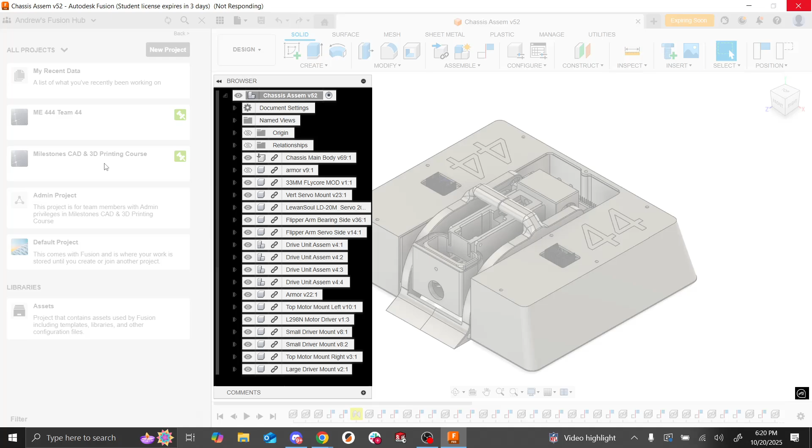In your hub, wow, this is super laggy. Open, please. Oh, nice. Okay, in your hub, awesome, Fusion crashed. Okay, so in your hub, I encourage you to create a folder, or I think it's a project. Some people put their files in default project and then they start losing their pieces. So I encourage you to create your own project. I normally name it like milestones class or something. There we go.

Yeah, so there's a new project button up here. I've already created a project, and then in there you can add folders and stuff like that. Obviously, I have several folders because I've taught this class a couple times. But yeah.

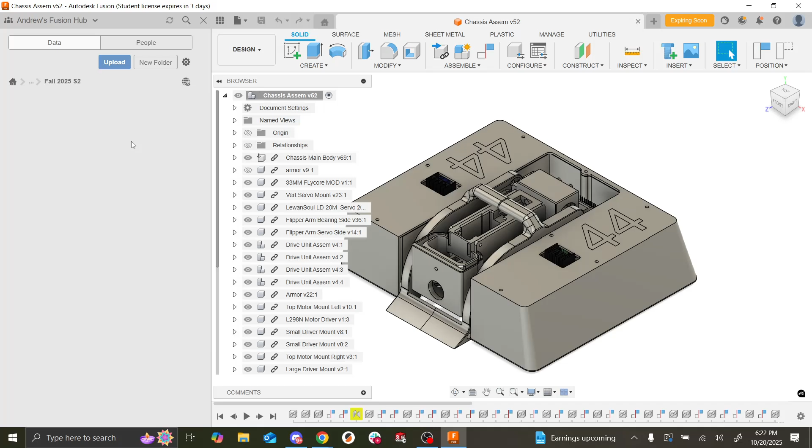Okay, cool. Also, who doesn't have a mouse today? Oh boy. Okay, I have one mouse. I will give up my mouse, but I encourage you all to bring mice to class. Just because... okay, sorry, we're unlucky today. If you bring a mouse, it typically makes CAD easier. So yes. Okay. So much fun. I wish I had more mice. Maybe I should bring more.

Okay. So raise your hand if you're not at this point in Fusion where you just kind of have a blank document. Okay, it's because you have a Mac, right? Is it because you have a Mac?

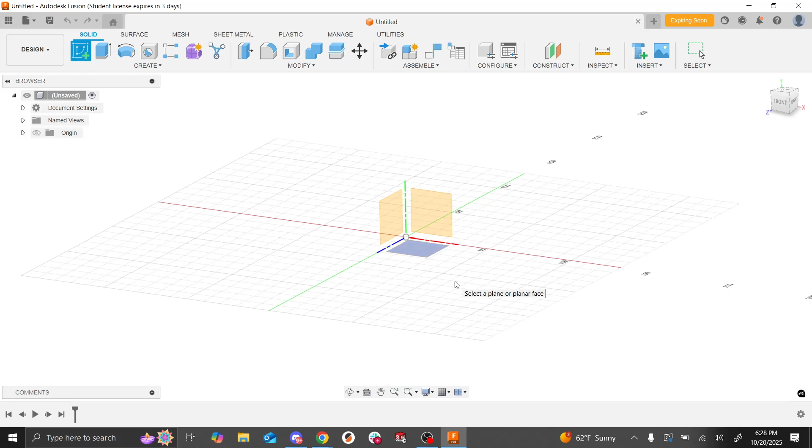So at the beginning, it gives you 3 different planes that you can work from, but then when you create more stuff, like once we create our cube, you can also reference those spaces that you've created. So right now there's just 3 because it just gives you an origin and XYZ, but I'll show you in a little bit that you can reference other stuff because it can be useful. So I'm just going to click this, and then you see the toolbar changes to the sketch toolbar.

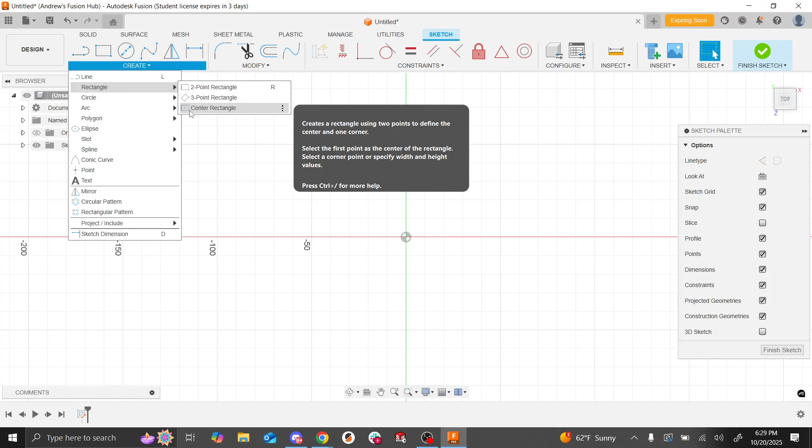I want to create a cube, so I'm going to create a rectangle. I typically like making a center rectangle because that just means it's centered from wherever I want to create it. Best practice or good practice in CAD is usually basing all your dimensions and stuff off the origin. So you can see there's this dot in the middle of the screen. That's the origin. Obviously, I'm going to deviate a little bit from that today because we're making 3 models in one part. But for the first one, I'm going to do it, in my opinion, the correct way. Obviously, you can not do that if you really want to, but it's typically easier for constraining.

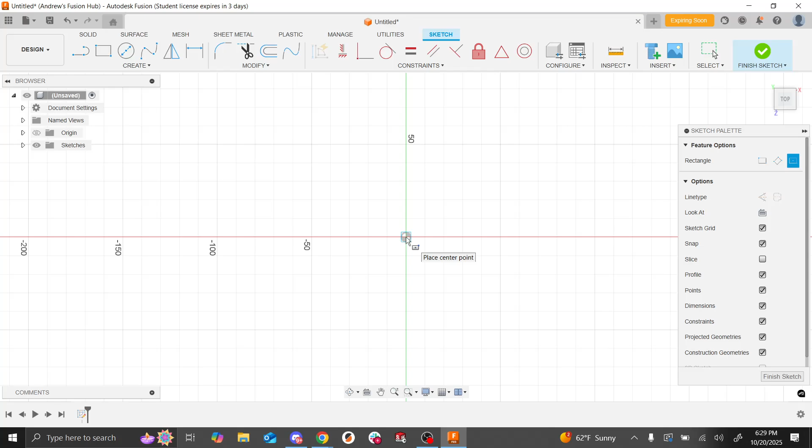So just make your rectangle. You can see the outer edges on the rectangle are blue. So blue on lines and curves means it's undefined, right? And when it's undefined, you can kind of stretch it in space. Oh wow, I accidentally just made a square perfectly. Okay, let's fix that.

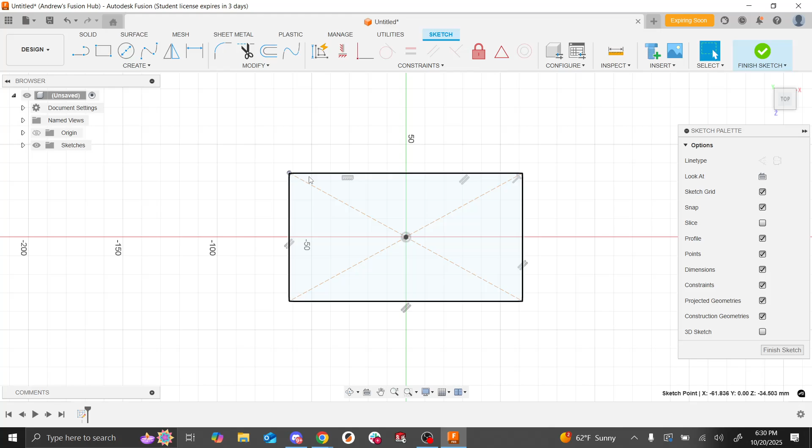So yeah, you should be able to move all around because it's not constrained. We haven't told it to do anything. But it's referencing to the origin, right? So you can see I can't move this rectangle side to side, which is a good thing. That means we only need to apply 2 constraints to make it fully defined, right?

So to add a constraint, today we're just mainly doing dimensional constraints. So there's the sketch dimension tool. You can click on a line or a curve or 2 lines. Click on 2 lines, you can get an angle, but we're not really doing that right now. And then you can set some dimension.

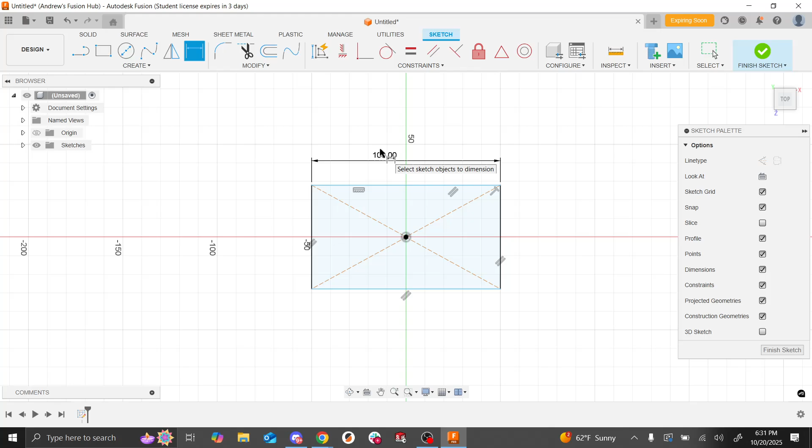In terms of units for this class, I don't really care what units you CAD in. I think there's only one assignment where the numbers on what I do matter. So if you're trying to copy me, but instead of 100, you do 120, that's totally chill. I will make sure to specify when you should be copying my dimensions. But for the most part, I'm not going to because you can do whatever you want.

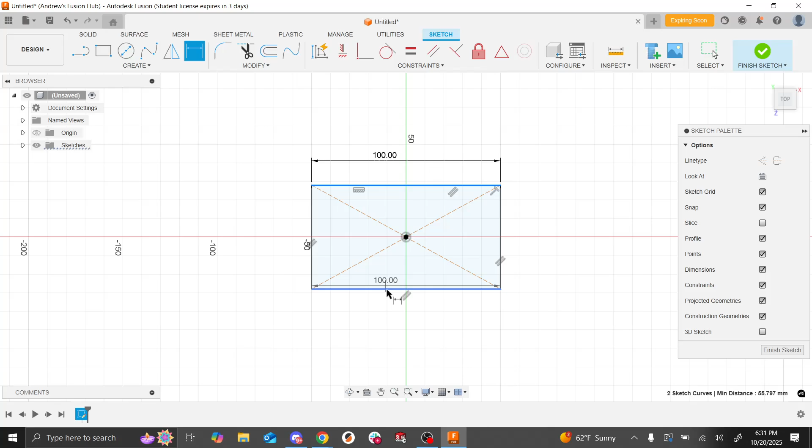So now that I have this 100, because it's a square, I'm going to make this 100 as well. We're going to be talking about geometric constraints next week. So normally I would make these 2 lines reference each other and I'd say they're equal to each other if I want a square, but I'm just doing 2 100s today, if that makes sense.

Yeah. Who's not here yet?

I know I'm going slow, but this is very fundamental, so I want to make sure you all know this very well because this is what you're going to be doing most of the time. Cool. All right. So, wow, we have a square. This is crazy. I'm going to press finish sketch because it looks very square-like and done to me. You can see here if I spin around, it's just flat, right?

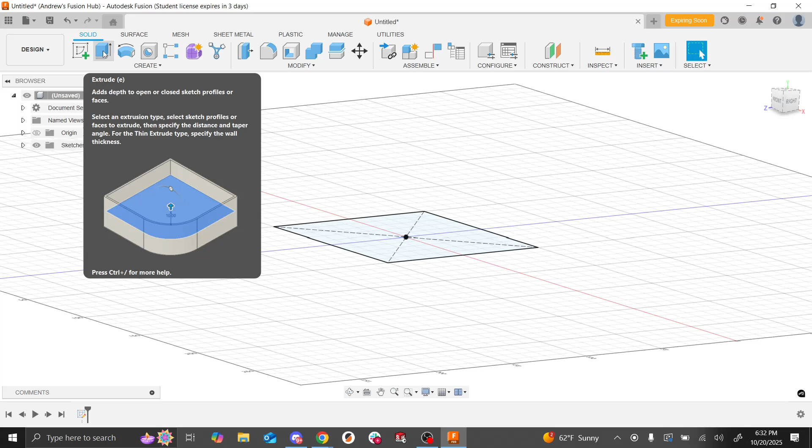To make it 3D, we're going to use the extrude function. One nice thing about Fusion, another reason why we like teaching it, is that a lot of the buttons are very big and colorful, and if you hover over them, it gives you a visual example of what it does. So you can see here, this blue section is the plane, and then you can see they're extruding apart, right? So we're going to do that as well. Fusion auto selects a plane in this case, but if it doesn't, you just click on the areas where you want it to be extruded.

The start is basically where you want the extrusion to start. Typically, if you placed your plane in the correct area, it's just going to be profile plane, but sometimes you want it to extrude offset from it, or extrude from another face that you're referencing. So those are two good options. I use that a lot, but today we're just doing profile plane.

For the direction, sometimes I like to do symmetric or two sides, depending if you want it to be asymmetric. But today I'm just doing one side. Basically, it'll just go from this face in one direction. A lot of these terms are pretty self-explanatory, so yeah.

For the extent type, we're doing distance because it's a manual number, but you can also have it extrude to other objects. So if it's a curved surface, you can select an object and then it'll extrude up to that curve. So it's usually pretty nice. And then through all is just to the farthest thing in your model from wherever the plane is. Sometimes it's good if you want to cut holes.

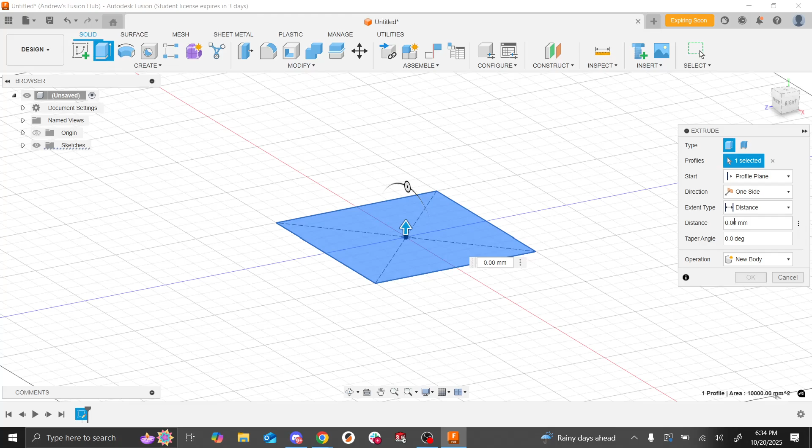So I'm going to do distance because all the other edges are 100. I'm going to do this as 100 as well. And then wow, we have a cube.

It's pretty crazy. I'm assuming everyone's following because I'm going, yeah. Okay, sweet. We good? Okay, so I'll do the next one a little bit faster now. Hopefully you guys don't fall asleep.

But we're going to do the cylinder next. Again, that's just a circle and then an extrusion. You can see when I press sketch, it'll give the three planes from the origin as an option, but you can also select this face or that one, right? All these faces from the cube. So I'm just going to select one of these cube faces, and then I'm going to draw a cylinder.

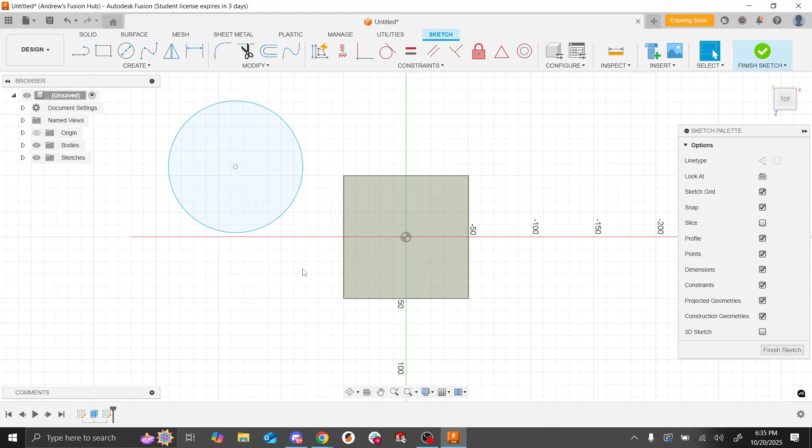Again, I'm deviating away from best practices now just because we typically don't model more than one part in the same document, but this is for demonstration purposes. And then I'll explain why, right? So before we had the center circle or center rectangle on the origin. If we do a circle out here in some arbitrary space, and then I dimension it, so 100.

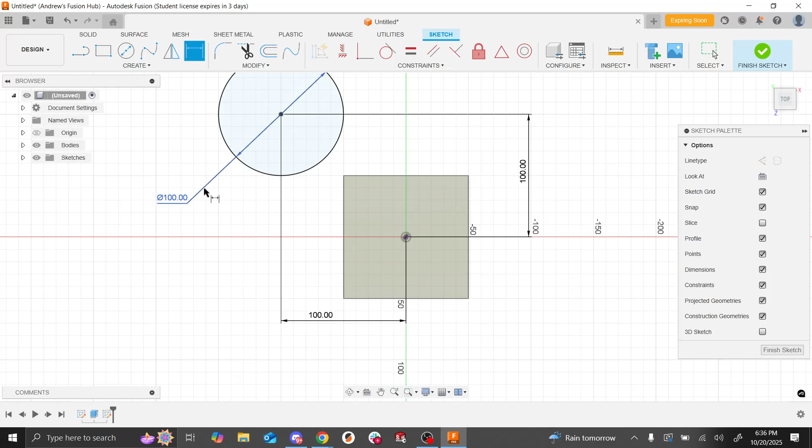The size of this circle is obviously not ever going to change now, similar to that rectangle, but it's still blue. And the reason is because you can drag it in free space because it's not constrained from the origin. And when you do that, you have to add more constraints. So you have to say the center of the circle is this far from the origin in the X direction, and it's also this far in the Y direction, right? So now that I've specified these two extra dimensions, this is fully defined.

Again, you can do this if you really want to, but it's usually easier and best practice to just put your stuff on the origin. It usually centers all your parts when you make an assembly, makes it a little bit nicer, and it just avoids these random arbitrary numbers. So yeah, I hope that makes sense.

The other thing I didn't really note is that closed bodies are highlighted in blue. It might be hard to see on the projector, but if you look at your screen, inside the circle, it's highlighted blue. That means it's closed, right?

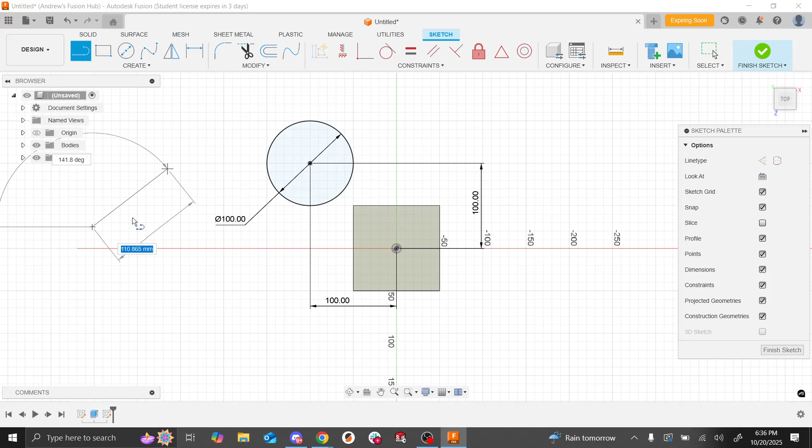So for example, let's say I have this arbitrary triangle out here, but I may have misclicked and these two lines are close to each other, but they're not quite touching, right? It's basically a triangle, but you can see it's not highlighted blue, and it's because it's not closed. The only way to fix that is by making sure it's closed. And you see when I joined those two points, it became highlighted blue.

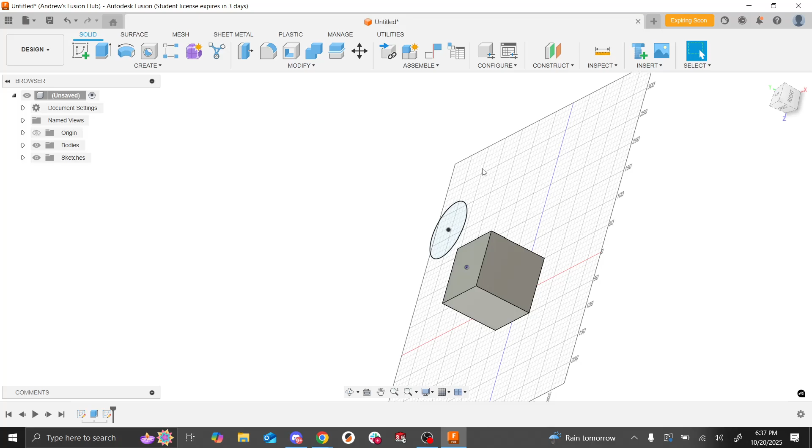So if you're ever wondering why your thing isn't allowing you to select it for an extrusion, it's usually because your body or sketch isn't closed. So keep that in mind. Anyways, I'm going to finish this sketch, and then I'm going to extrude this just like before. I'm just going to use some different tools so you can see how it works.

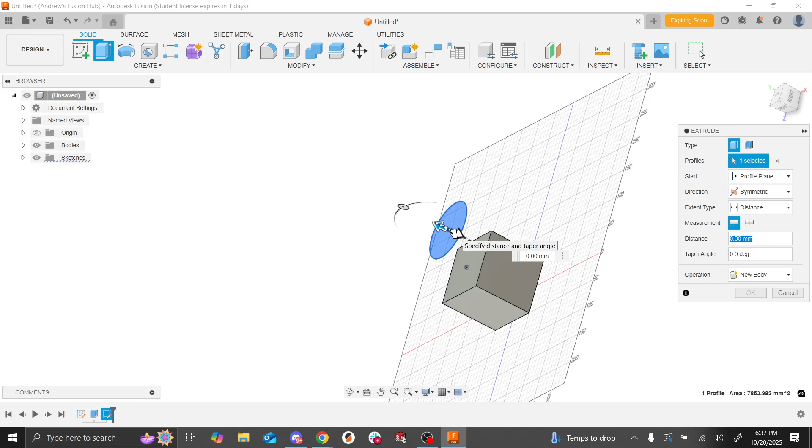So for the direction, I'm going to do it as symmetric. The distance, I believe, is the distance from one side. So let's say you want this to be 200, but you're doing a symmetric extrusion, you have to do 200 divided by 2. In this case, it's just 100. So 200 divided by 2.

Each side is extruded 100 millimeters. If you look at the sketch in the timeline, you can see it's referencing this plane. So when I extrude 100 in both directions, it made it flat on the same height as this. If you did the exact same thing as me, it should look like this. But if your numbers are different, that's fine.

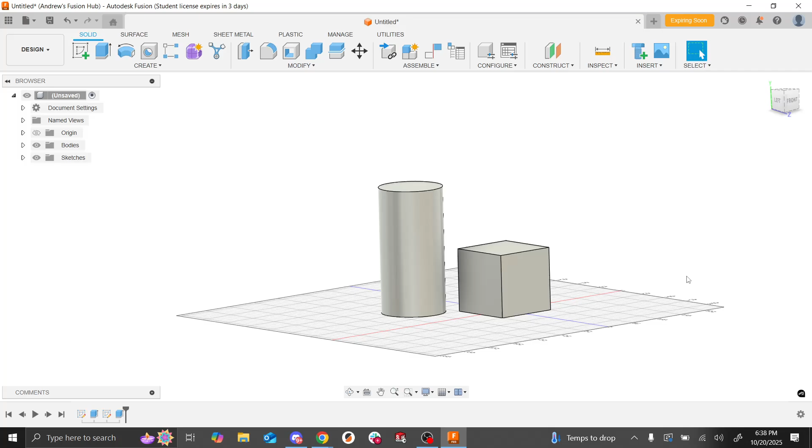Awesome. Okay, so for the last one, there's a couple different options on how you can do this. CAD is kind of like writing, everyone has their own style, some people have preferences for certain tools. So there are a couple ways you can do this: you can make a rectangular prism similar to this cube and then cut out a semicircle, or you can make it all at the same time. Depending on what you're designing, one way might be better than the other—like if that arch changes a lot, maybe it's better to do it differently. Considering it's just a simple block, I'm going to do it all at the same time, but there are different ways of doing this.

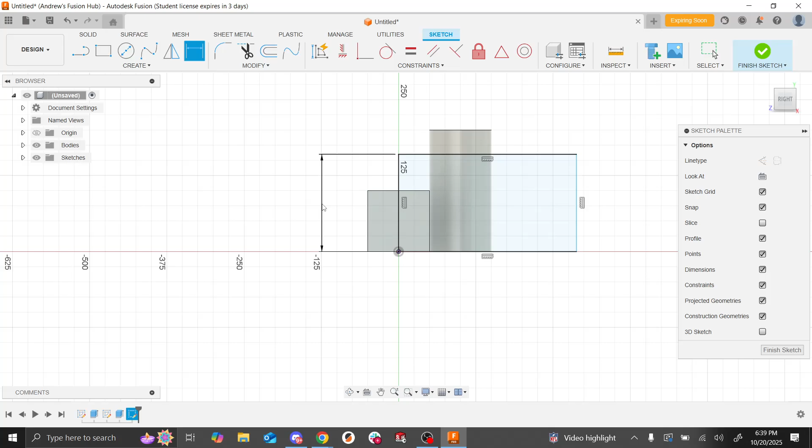For this, I'm just going to create another sketch. I'm going to reference this plane, and this time reference the origin and create this rectangle here. You can see these two lines are defined because they're already connected to the origin. Going to specify some heights and lengths, and then boom, that looks good. So we have our rectangle.

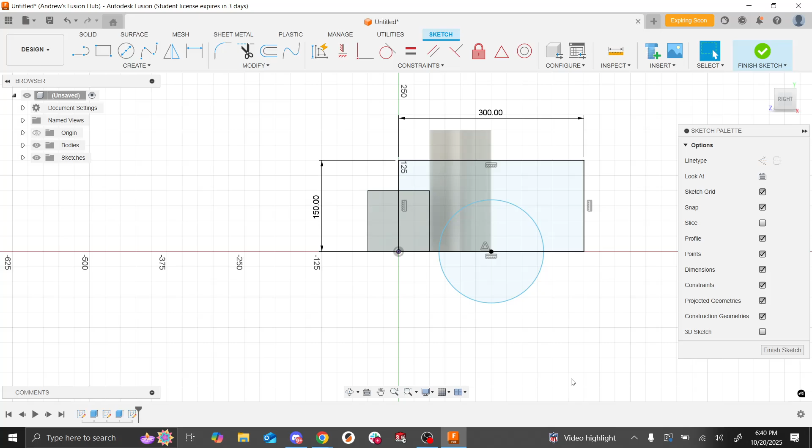Now we want that circle. We're going to add a circle onto this rectangle. You can see if I run along this line, it'll snap at certain places—sometimes to the grid, but there's this point here where it snaps with a triangle above it, which is the symbol for the midpoint. That means my mouse is currently in the middle of that line. So I want this centered, I'm going to do that and add some dimension.

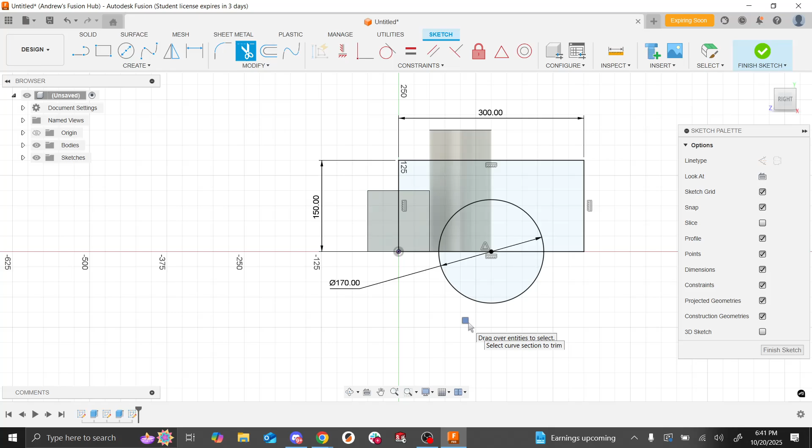And then boom, you see here we have a couple of different closed loops. I just want to trim it away so it's nice and clean. So I'm going to cut this side of the circle away and also this center line, and you'll see some stuff change. To do that, there's this scissor tool or trim tool—the hotkey is T for anyone interested. You can either hold down left click and run your mouse over the line you want to cut, like this one, or click on the line you want to delete. The red section is what goes away, and the blue section is what it keeps. It usually trims the line or circle to the next nearest vertex or point.

So when we do that, you can see the circle turns blue, because it was midpoint to that line initially, but we just deleted that line. So now it can only move side to side, which isn't what we want in this scenario. To fix that, you could add a dimensional constraint and make sure both of these are the same length by doing some math, but we can make Fusion do some of the math for us. This is a sneak peek into week 2, but over here with all these red tools, there's a bunch of geometric constraints. In this case, to center this, it would be ideal if these two lines were equal to each other. So we can use this equal tool, select them, and boom—fully constrained.

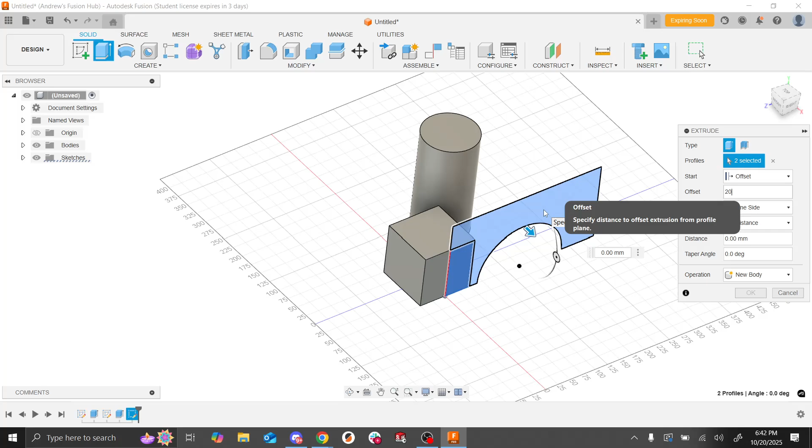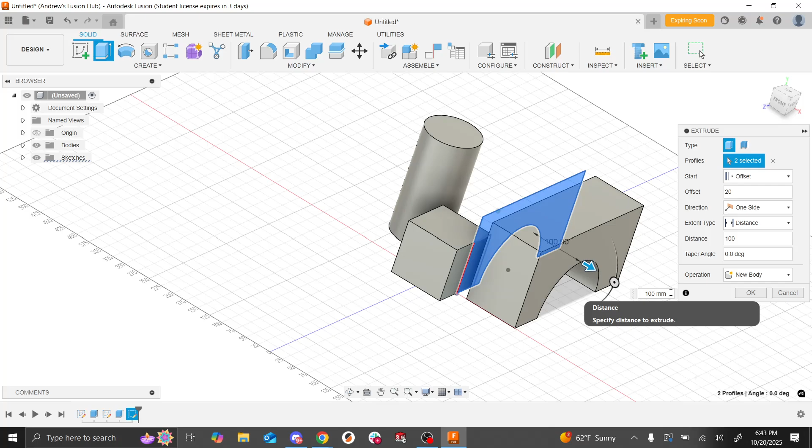I'm going to finish this sketch. Obviously, this sketch is right on this face, so when I go to extrude it, I can set the start to be an offset, so it's moving a little bit away from the part. Let's do like 20 or something like that—you can see the arrow moved. And then when I apply a distance, let's just do 100. You can see here there's a gap between the profile we just created and the actual solid body. So that's kind of how the offset function works.

Everyone understanding this? Okay, cool. I know for a lot of people who know how to CAD, this is really basic stuff. But if you were brushing up on stuff like constraining at the origin, I hope that's useful. But yeah, anyways, we're basically done with this.

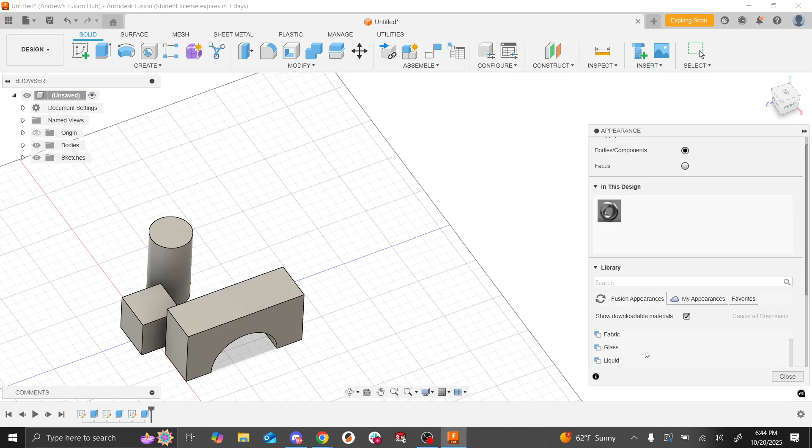appearances installed when you get the program, and then you can select them. Down here, you can see there's a bunch of different options. I usually go for paint, I think, and then I use glossy, but that's just a preference.

When I ask you to assign an appearance on these parts, please don't do it as gray, because if it's gray, I'm just going to assume you didn't do it. All the models come out as gray, so if you choose a nice colorful color, it'll be painfully obvious to me, and I can't take points away from you. So when you apply an appearance, please make sure it's not gray or black. Black I will probably be able to tell, but if you want to be safe, just make it colorful, please.

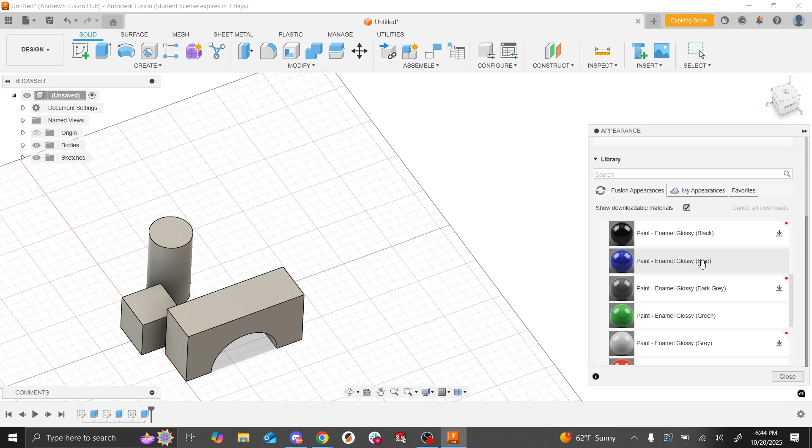For the appearances, you typically have to download them. They're maybe a couple megabytes. But once you download them, you just drag and drop to the body that you want. So say I want this to be blue, this to be green, and this one to be red. And then boom, we have colors.

Good, sweet. I know this first assignment is slow for a lot of users or students, but I just want to make sure we have pretty strong fundamentals, because this class tends to ramp up pretty quick.

All right, so I assume everyone's good here. I'm just gonna move on to the next assignment. Yes, wait David, are we good? Okay, like 2 minutes, okay.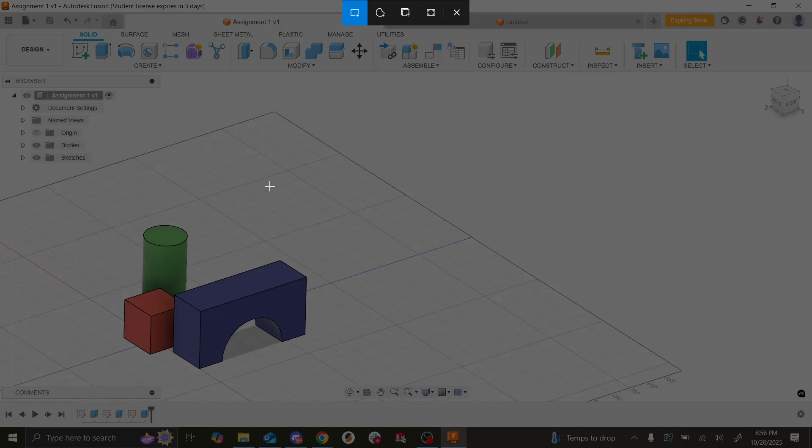Okay, yeah, I'll do a demo if y'all are confused. So when I screenshot, I want to see the model, obviously, but then I want to see the timeline too. So at the minimum, your stuff should look like this. But it's usually just easier to submit the whole screenshot.

Okay. So it's almost 7 now, so hopefully we'll get everything in. Okay, shit, okay, so...

Next assignment is the Purdue hammer. I'm going to go a little bit faster this time. So again, if I'm going a bit too fast, just bear with me because you can rewatch it later, but hopefully it's at a good speed.

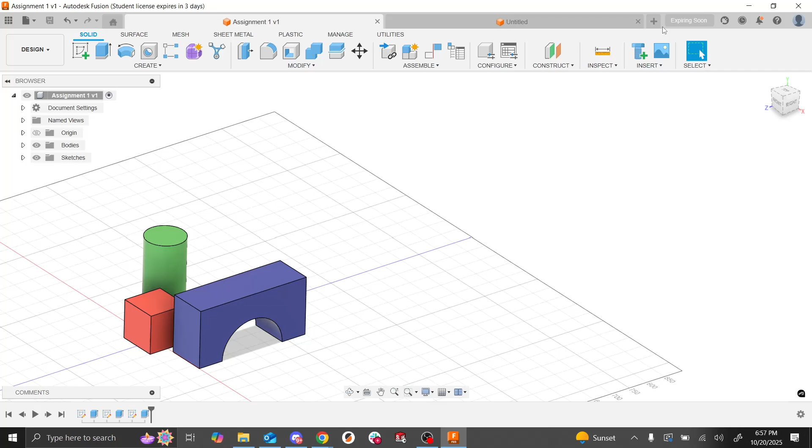Anyways, I've created a new document here and opened it. There's a couple ways we could go about doing this: we could make a cylinder, then a rectangular prism, and then another cylinder on top. But what I'm going to do is only make two different features, one extrusion and one rectangular prism, so we're going to be a little bit clever with some offsets to make that happen.

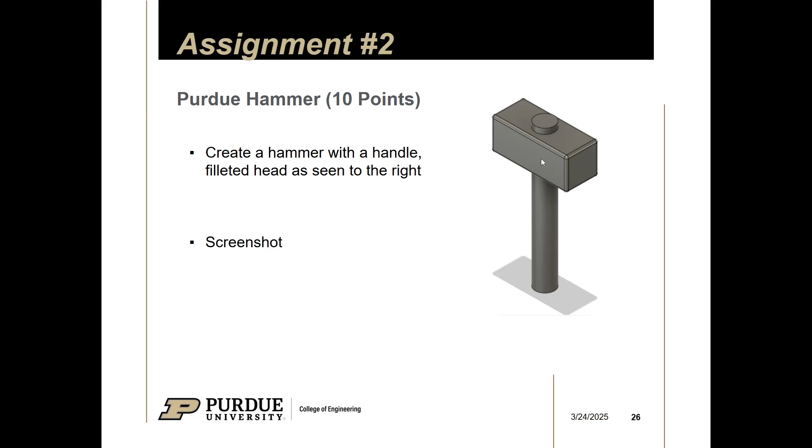So I'm going to create a sketch here, make a circle from the origin, add a dimension, and then extrude it. Also, if you're curious, the hotkey for extrusion is just E, so that might save you some time. I'm going to extrude it a lot more. Okay, cool, we have our cylinder here.

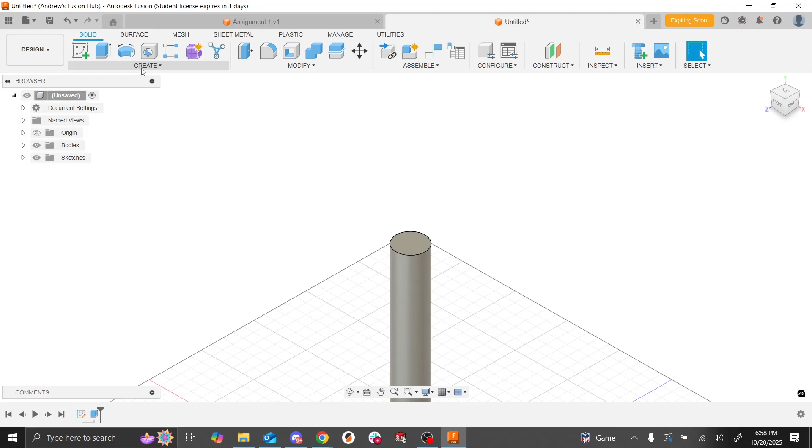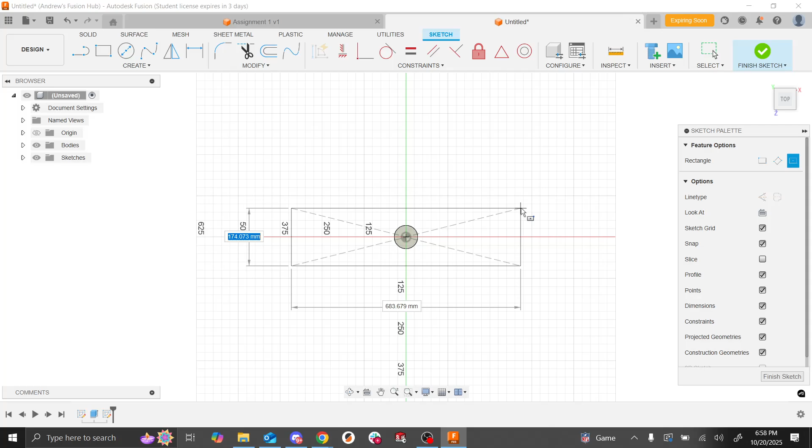I'm going to create a sketch, and this time reference the top of the cylinder, so you can see the origin's way down there. I'm going to reference this spot up here, and create a center rectangle because I want the hammerhead to be centered on the circle. Adding some more dimensions.

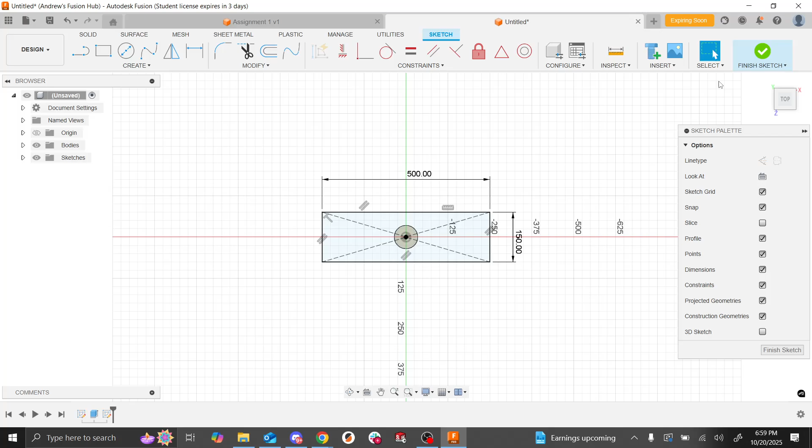Okay, so who's not here yet? Okay. Yes.

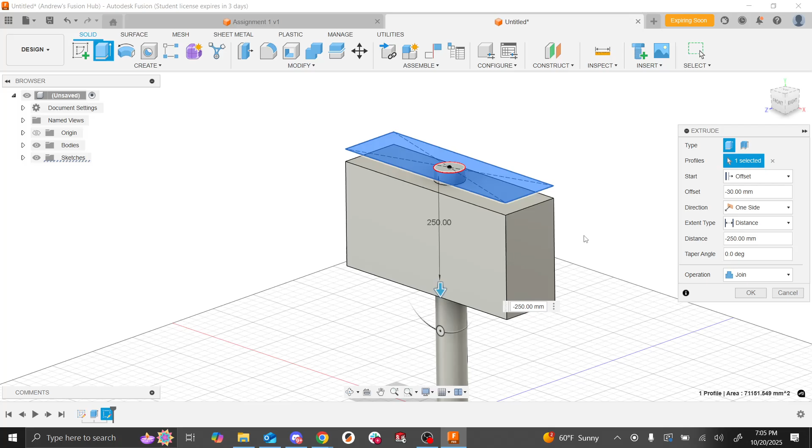That's where I'm going to use this offset. I think in this case it has to be negative because the initial arrow is going upwards. So if I do negative 300, maybe not 300, negative 30, you can see there's that bump there. Let's make this a little thinner. And boom.

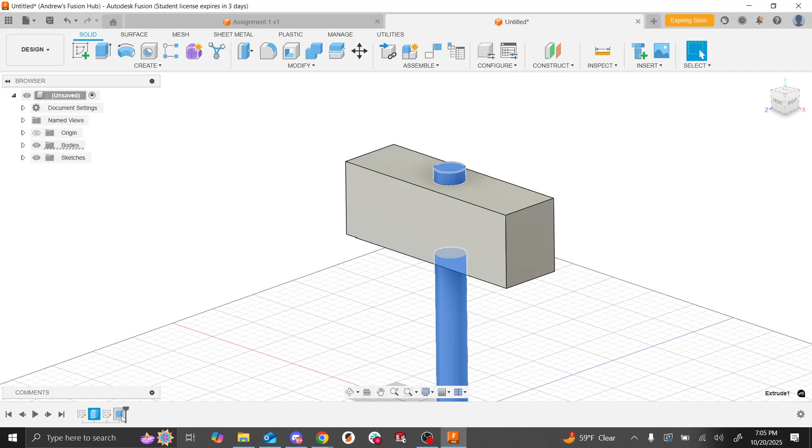So again, there's more than one way of doing this. This is maybe my personal preference, but there are other ways and they're not wrong. If you did it another way, that's perfectly fine. The reason I did that is just so there's less clutter on the timeline. There's only two sketches and two features, right? Obviously you can do it other ways, but yeah, that's how I did it.

The last thing for this is adding fillets to all the corners. A fillet is basically just a little round thing that you can apply to edges and stuff like that. To add that, it would be over here. The other option for an edge thing is a chamfer. A chamfer is like a straight cut.

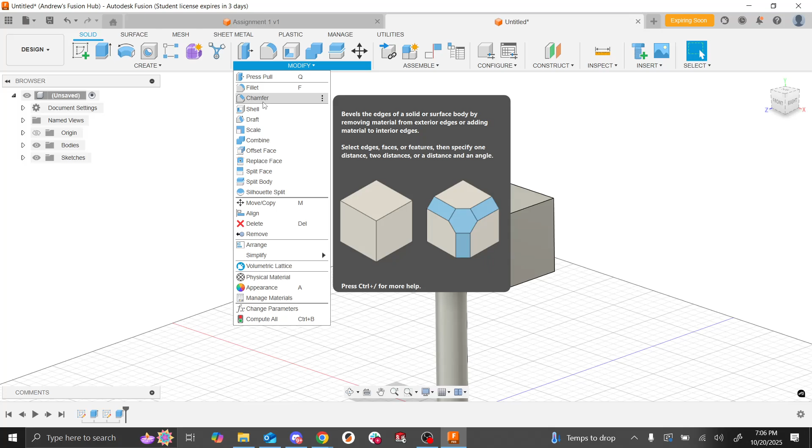Depending on your application, you may want to use one or the other. When we talk about 3D printing later, I tend to favor chamfers over fillets for a lot of things, but I can explain that in future weeks. For this model, we want it to be nice and round, so we're going to do a fillet, and we're not printing this, so it's perfectly fine.

To select, you can select edges and faces. In this case, I want all 4 of these edges to be filleted. So instead of clicking every single edge, I can just click on the face. And then I'm going to do that here as well.

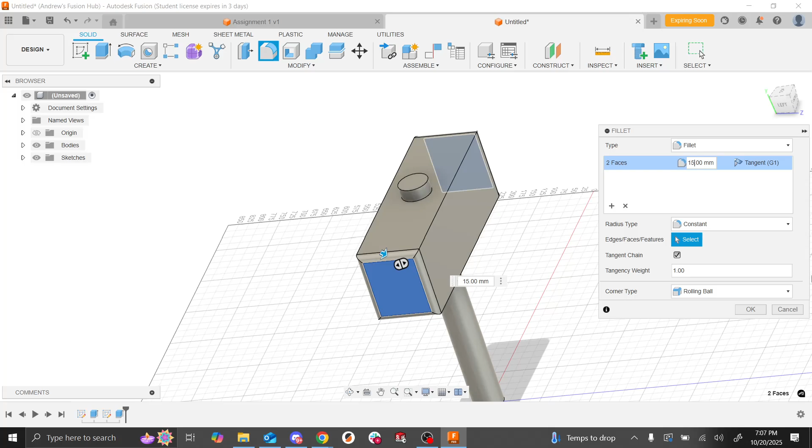You can specify some radius. I don't know, maybe more. Okay, obviously if the number you select goes higher, it will round it more. You can see here I forgot to do some of these.

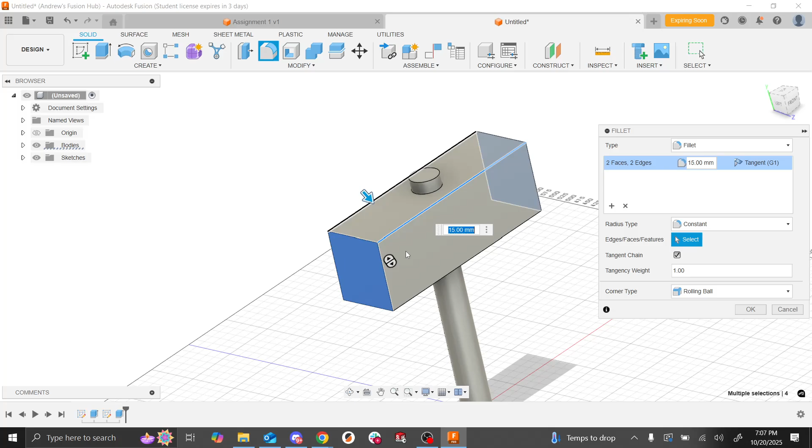To add more to your fillet, you can hold down Control. Yeah, I think it should be Control for Mac as well. But you hold down Control, and then you can select additional edges, like that.

The other thing you can do in the fillet tool, which is kind of interesting, and I think it's unique to Fusion, is that you can have multiple fillet radii in the same fillet on your timeline. So for example, like I want these two. Let's do this and that as 15. Then you can add another selection set, and let's add these.

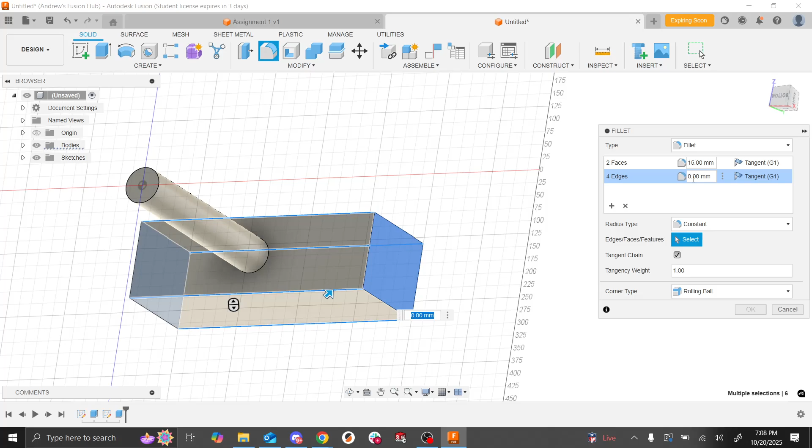You don't have to do what I'm doing now, I'm just showing you some more functionality. And then if we set this to 30, you can see it'll fillet this one and this one at the same time, which is kind of interesting.

So yeah, this should be it for assignment 2. Anyone confused on the fillet tool? It's pretty fun, it makes things nice and round. Okay, all right.

So for the next assignment, or the last assignment of the day, we're going to be using the revolve tool. It's similar to the extrude tool where you create a 2D sketch. I don't know if you've done calculus, I think it's calculus 2 when they do the disc and washer stuff. The disc and washer stuff is basically what we're doing, but in Fusion.

So we're taking this 2D profile and then we're copying it a bunch of times in a circle until we get our nice round object. So we're basically going to create this profile of a quarter of a game piece, and then we're going to revolve it around the center axis.

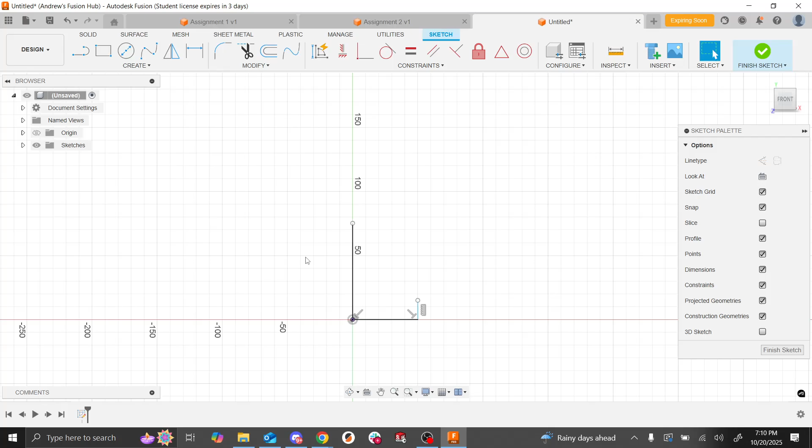So making a sketch here, selecting a plane, and then I'm going to start drawing. You can see here there's some lines, vertical and horizontal. I'm going to go like this. And then I'm going to create a circle here. The shortcut for circle is C if you're curious.

And then I'm going to create another line and then an arc here. So line, and then an arc. Oops. I can do maybe a 3-point arc right here.

I got 2 lines, selecting start and end, and we have this here. So personally, what I like to do is I just kind of like throwing out a bunch of lines and circles and then dimensioning them. But if you like to go one feature at a time, it's totally cool.

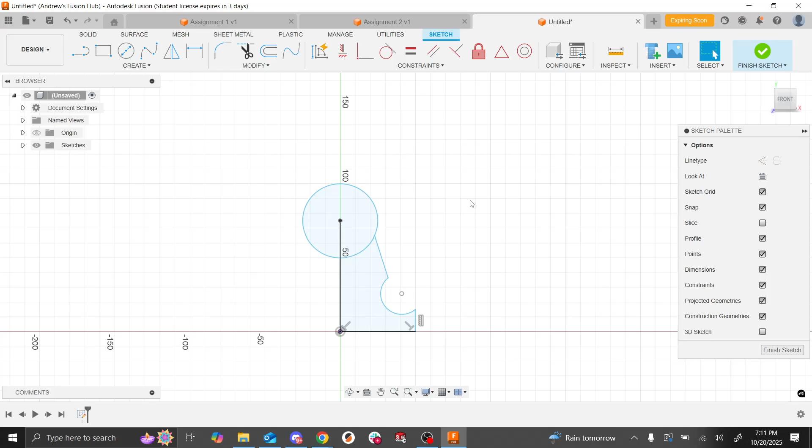You can see here this piece looks quite demented, so let's start fixing it. Right here, you want this curve to have a smooth transition to this line. So another sneak peek for week 2, we're going to use a tangency constraint. This makes it so the transition will be nice and smooth. I'm going to select the line and the circle. There we go.

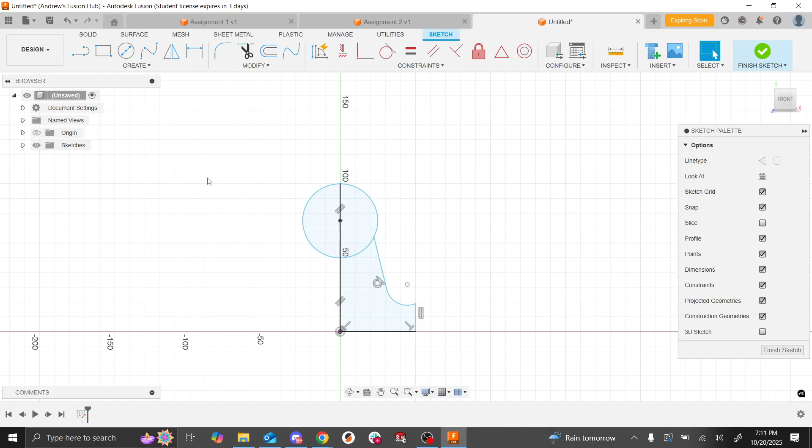And then I'm going to add one more line here to close it, and then I'm going to trim away the rest of the circle. So trim, looking a little bit better. And now I'm going to add some dimensional constraints. So 15, 30.

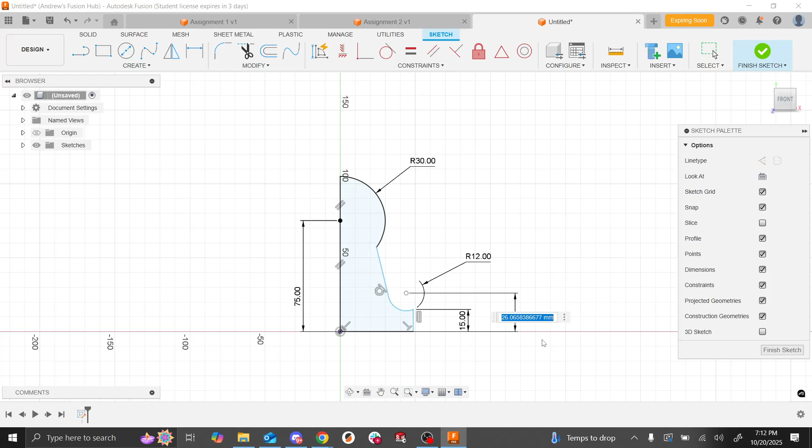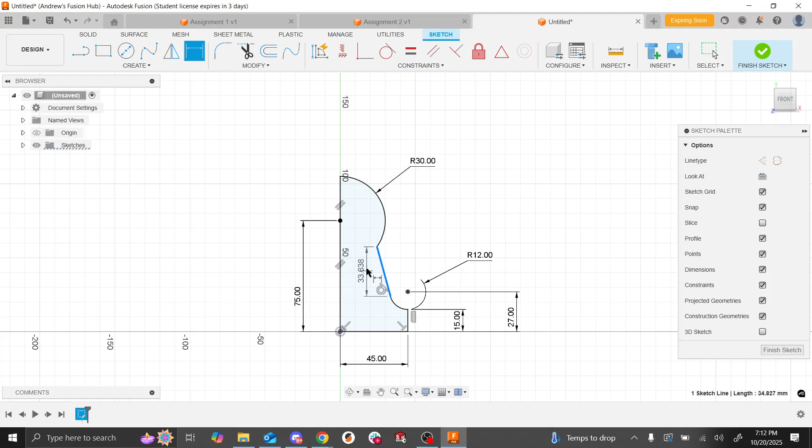This radius here. This distance. And then I think you should be able to do angle. So if you haven't done angle yet, you can take two lines that aren't parallel to each other and click on both of them in the sketch dimension, and then you can specify an angle.

Yeah. I know I went kind of fast there, so I'm going to walk around. But once you're finished, all the lines in your sketch should be fully black.

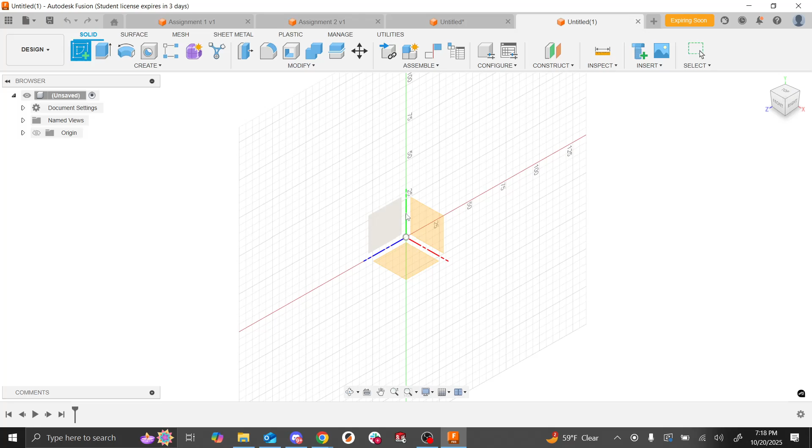Because maybe I went a little too fast. Okay, so to create the profile, I'm gonna kind of create like a big L here. So vertical lines here. I'm then gonna create this circle here.

And then to connect this point and the end of the circle, I'm going to use a combination of lines and arcs. So I'm going to make a line going from the circle out to here. And then if I go under create and then arc, there's the 3-point arc. This allows you to select a start of the arc and then an end of the arc and then the radius. So I can do that.

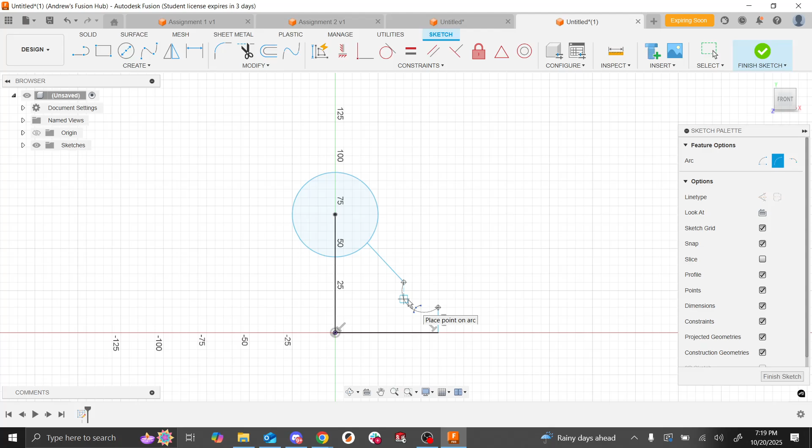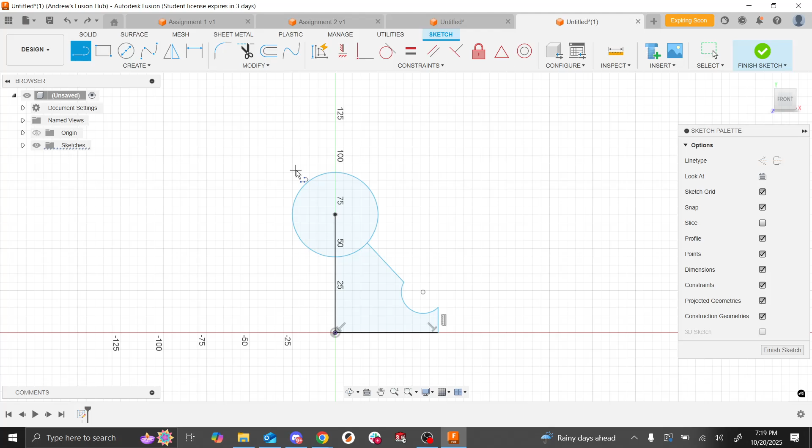And then you can see you need another vertical line here to make the trim properly. If you don't add the vertical line and you trim this, it's going to look like this, right? And you don't really want that. So you have to tell it to end the trim here by adding a vertical line and then trimming it. So when I trim away, there's still this vertical area, and then I can trim this little piece away as well.

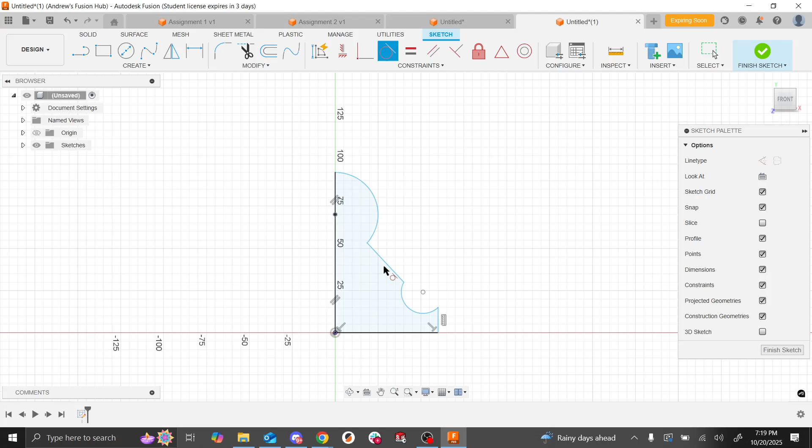And then to make this nice and smooth, again, we're using the tangent constraint there, and then the edge of the circle. And then we have our game piece. I'm going to walk around again.

So didn't you already do that? I did, but I saw a lot of people still struggling, so I thought it was critical. I was doing it my last day. I'm paying attention, I thought I was at least.

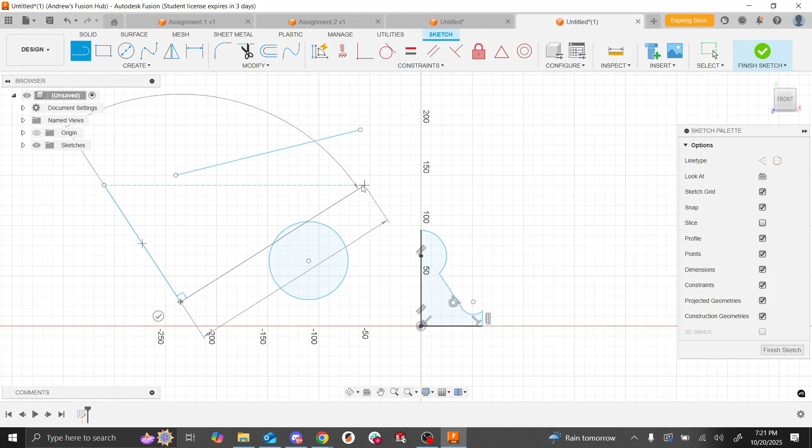So this is a little thing we're going to talk about next week. But basically, when you're creating geometric constraints, okay, this is a pretty important topic, so I hope you all listen to this. But I'm going to talk about it again next week. But oh wait, it's easier when I do a different example. So you can see I'm going to draw two lines, and they're both in different directions, right? These are very arbitrary lines.

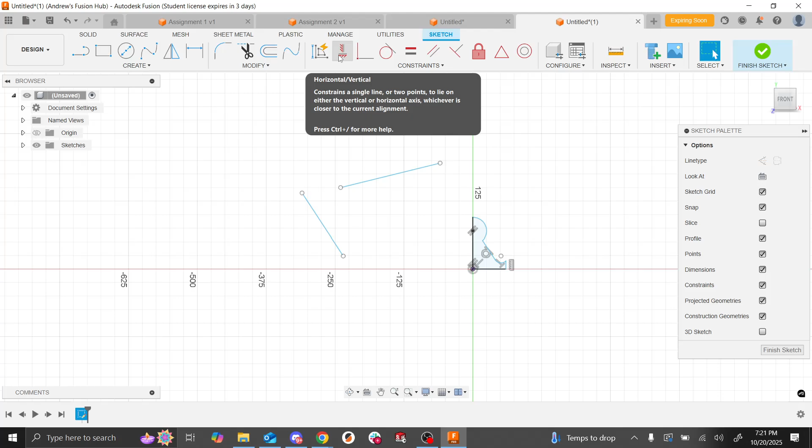But let's say in my mind, I want both of these lines to be horizontal, right? This line on the top is closer to horizontal, and this one is closer to vertical, right? Fusion has a horizontal vertical tool where you can make lines horizontal or vertical, but Fusion is going to assume the one closest to it is the one that you want. So I want both of these to be horizontal, but if I use this tool and I select this to be horizontal, that's right. But because this one's closer to vertical, that'll go vertical, right? And this applies to all constraints.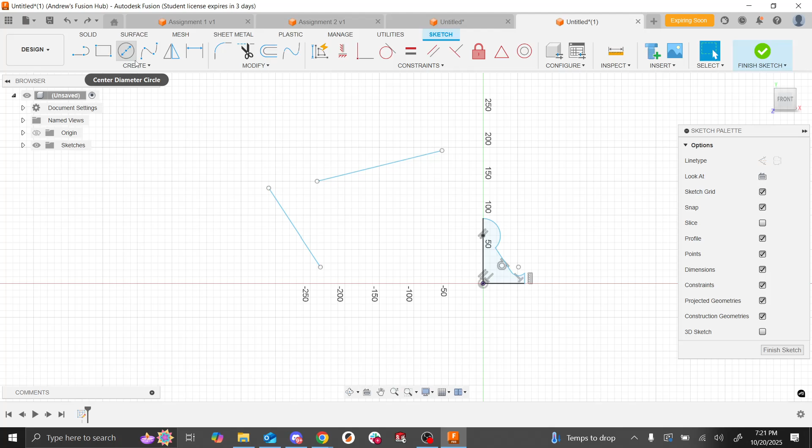So I saw some people had their arc like this, right? And then their line was like this. You can see this being tangent to this side of the circle is easier for Fusion. So if I apply a tangent constraint, it'll do that instead of looping it nicely the way it was here, right? So to fix that, you want to undo the constraint, and then you kind of have to nudge Fusion in the right direction. So if you move this point here, it's closer to this side of the tangent line for the circle than before.

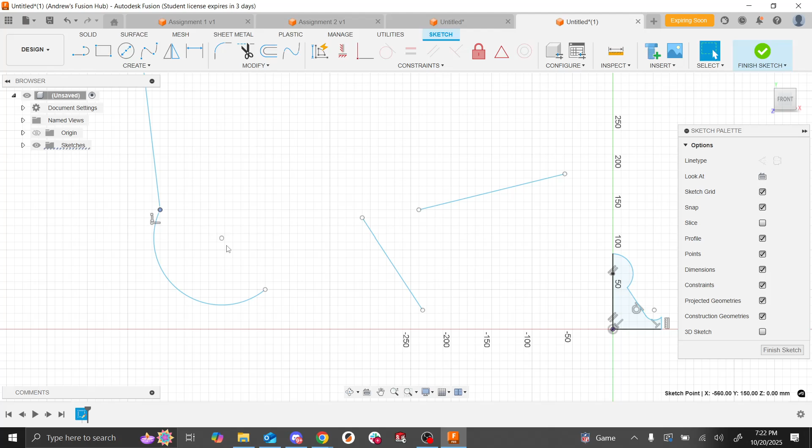So if I apply the constraint again, then it's the way I want it. So I'm going to go over this again next week, but keep this in mind because it's a pretty important thing, because if it's not in the right place, it'll be doing the wrong thing and then you'll get annoyed and sad. So yeah. Does that make sense? Okay, cool.

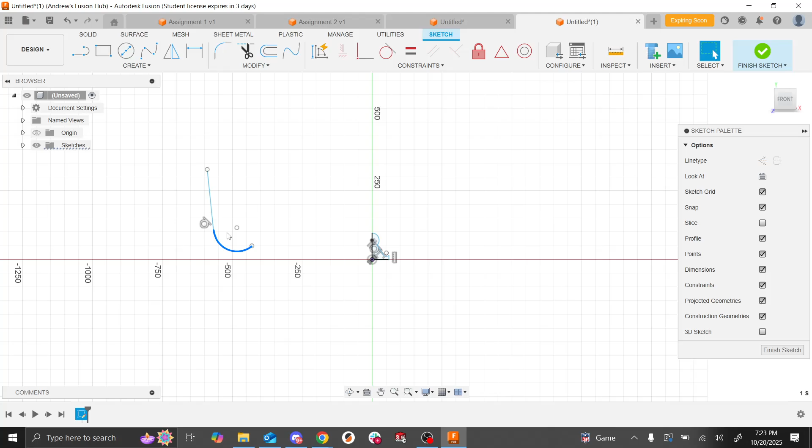Again, I'm going to be talking about it next week because next week is mostly geometric constraints. So it's mostly a sneak preview for next week. But yeah. Okay, we have 7 minutes, so I'm going to go faster. Hopefully you have this fully constrained like this, but if not, it's probably fine. This is just best practice before you exit a sketch that it's fully constrained, just so there's nothing arbitrary about your design.

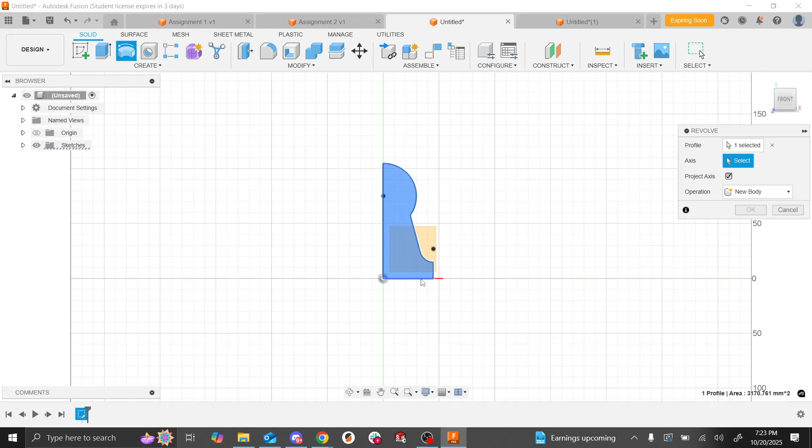So now that I have this finished sketch, you can see again this profile is blue. I'm gonna create a revolve instead of an extrude, so it's right next to it. It'll ask you to select an axis. You want to make sure you select the right one. Obviously, if you select the wrong one, then your game piece is gonna look weird. This isn't really what we're intending for. But if you select the right axis, it should look like a game piece.

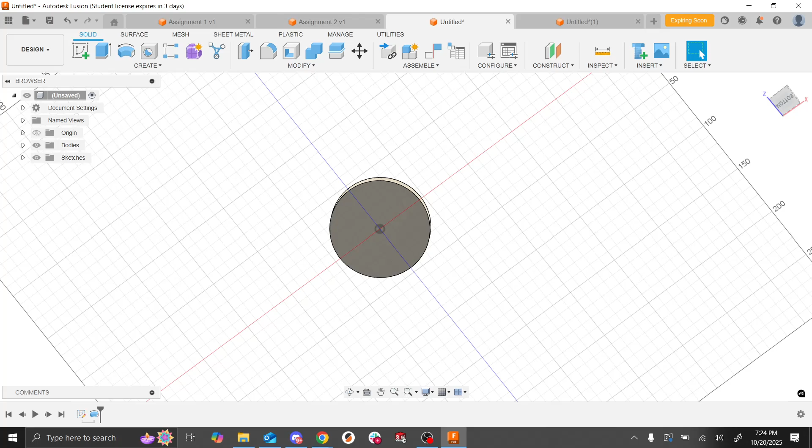But yeah, the last thing for this assignment is adding text at the bottom. So what you want to do, you want to create a sketch on the bottom face, and then you can go create text. You can create either a text box or text along a line or something like that. I'm just going to create a text box.

Bro, what the heck? Okay. Okay.

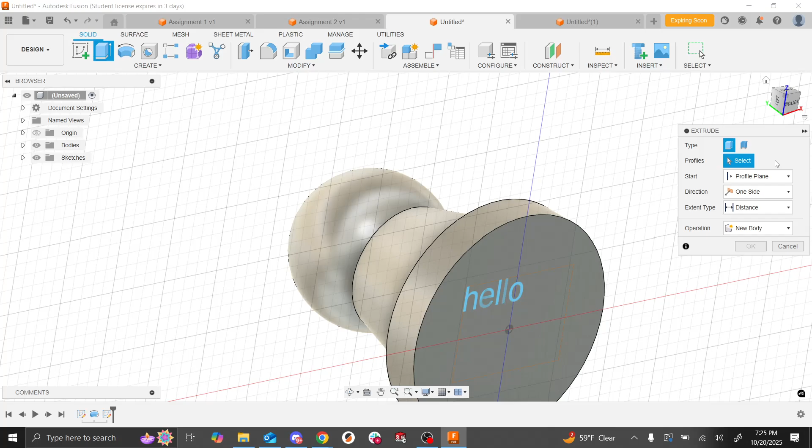Obviously, you can change the height and stuff like that and the font. I'm just gonna leave it as is. But I have this here. I'm gonna exit the sketch, and then I'm gonna extrude the letters. So in this case, it automatically was guessing that I was gonna extrude this whole face. So I'm gonna delete that selection and then specify that I want to do just the sketch.

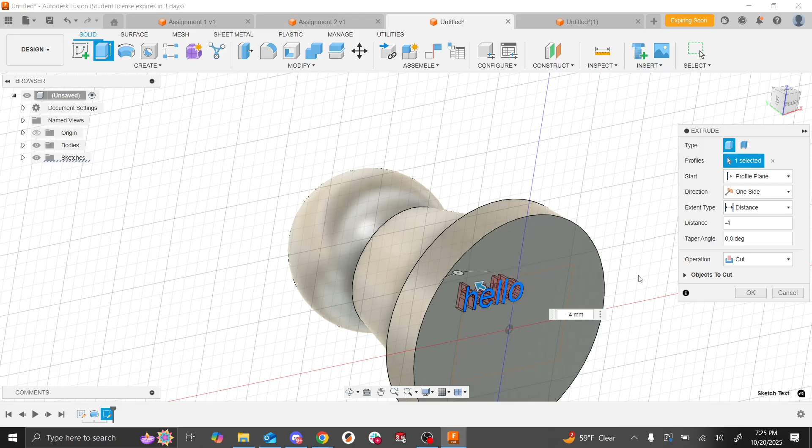You can see the arrow here on the extrude is going outwards, but I want it to go the other direction. So I'm going to specify the distance to be a negative number. And then you can see it'll set the operation to cut, which means it'll cut into the model, right? So that's what we want. I'm going to press OK. And then we have this text cut into our model.

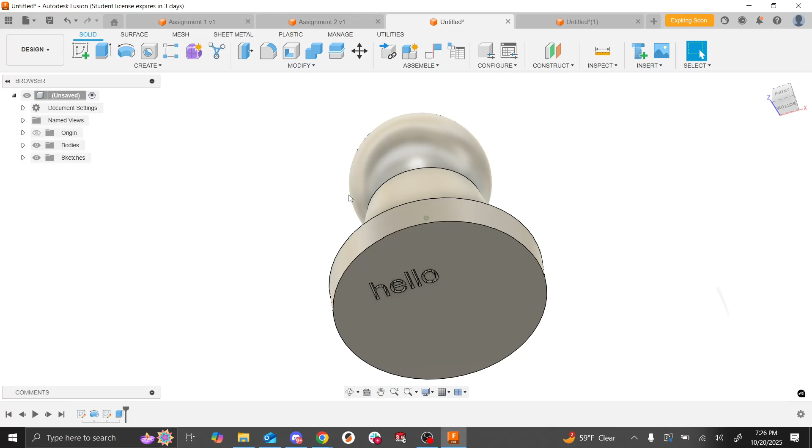Again, when you take a screenshot of this, make sure I can see the text at the bottom. A lot of people send me this, and then I'll be like, where's the text? And I won't know. Again, if you show me the timeline, you can see here there's a revolve and an extrude. So I'll kind of know that you've made some kind of extrusion, but it might be helpful if you show me the bottom as well.

But yeah, the last thing for this is just adding an appearance. Only on the ones that say that you need to. I think the hammer, you don't need to add it. I kind of forget which ones do and don't need it, but it will say in the rubric. So yeah, game piece. Does anyone have any questions about the text function? No? All right, sweet.

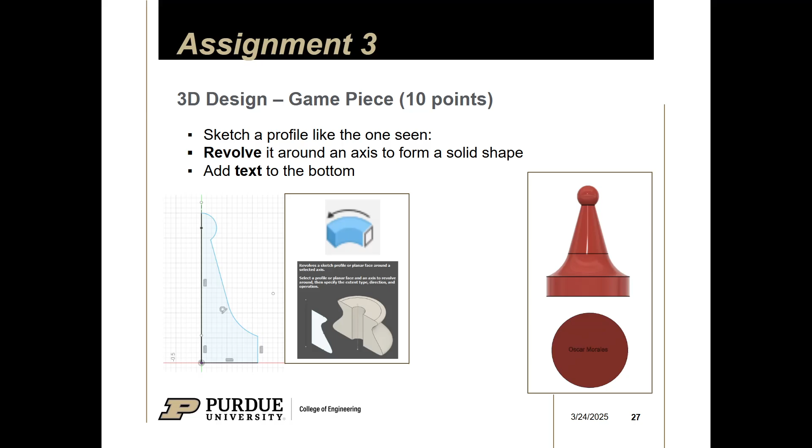Okay, so that's basically all the demos I'm going to be doing today. It is almost 6:30 or 7:30, so we're just on time. Your homework for this week is to create a chair. I think it's just making sure it has 4 legs and stuff like that. You can read the rubric, I kind of forget. But yeah, make something that resembles a chair, preferably something that is nice looking to sit on.